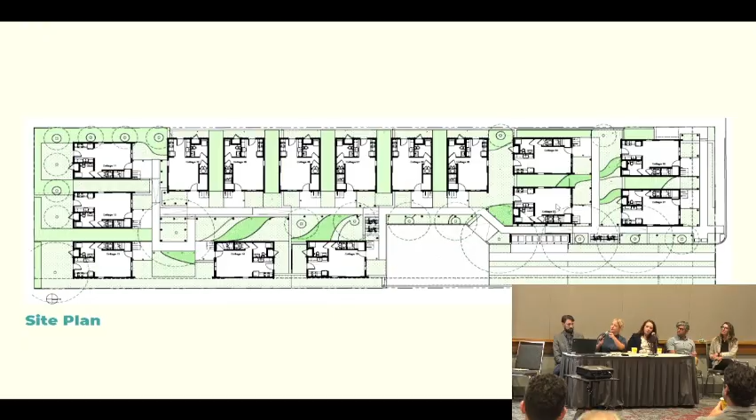It's actually 2 clusters, one larger courtyard in the middle and a smaller courtyard. And then we were able to get a drop-off zone and fire access through the fire lane on the bottom of the site.

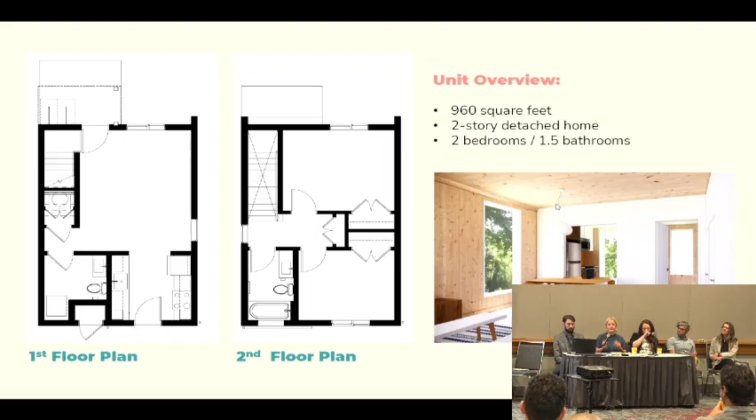Here are some of the unit plans. As I mentioned, it's just under 1,000 square feet, and we have 2-bed, 1.5-bathroom units here. You can see we're really focused on the detached model rather than attached, because we love to have extra daylight and a really livable, marketable plan that works for a variety of household types.

Critical to the Shortstack vision here is also studying how we can find design, cost, and construction efficiencies, and the use of mass timber we think is a really important tool in this research. It didn't pencil out at this scale to build all 15 homes utilizing mass timber cross-laminated timber panels, but through a grant from the U.S. Forest Service Wood Innovation Grant Program, we were able to do one home with cross-laminated timber walls, roof, and floor panels, which you can see here.

The panels flew in one day. It went up really fast, and we're excited to show some information at the end of this project as a differentiator—not just what is the cost difference or the time difference to build, but what is the marketability difference? Is this the first home to sell, or are buyers not really that interested in a wood home? So we're going to have some interesting feedback coming out of that.

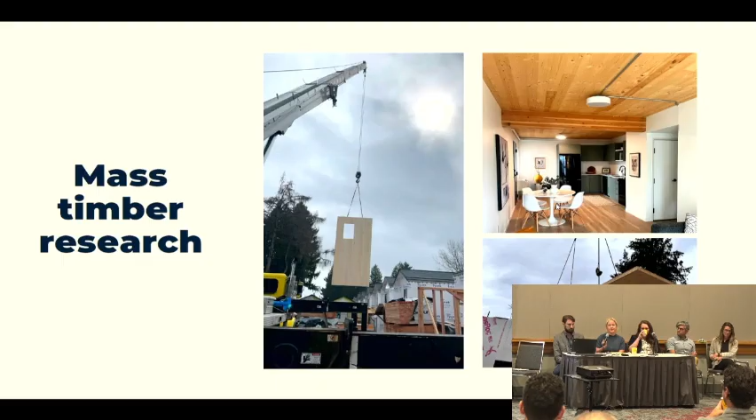Just briefly, our latest cottage cluster site is part of the Hillside Master Plan redevelopment led by Related Northwest, and part of the Housing Authority of Clackamas County repositioning that Gloria is going to be talking about. You can see here, we took what we learned from the other Milwaukie site, and we're able to fit 20 homes on this lot, and we are building some off-street parking here because the width of the site really lent itself to that.

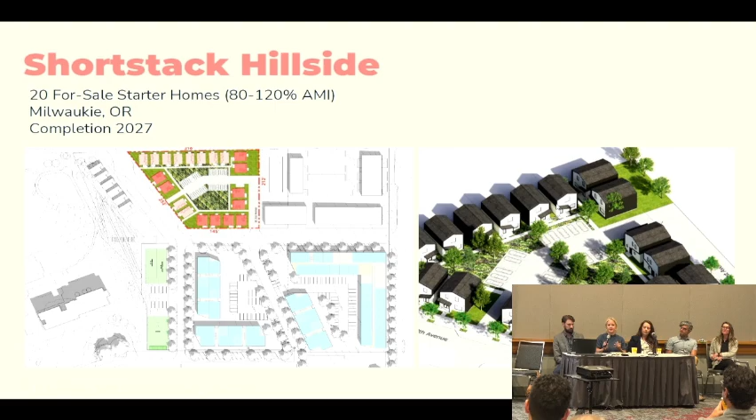In this case, we are prototyping a 3-bedroom unit in addition to the 2-bedroom unit. Again, I think it's a great example of how that medium density or neighborhood-scale density can be a really comfortable result from the cottage cluster zoning, where it just fits pretty well within a residential neighborhood and doesn't feel completely out of place.

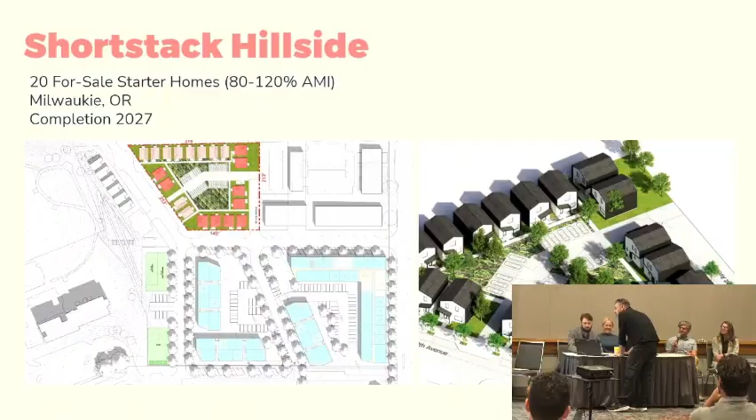Yeah, oh, we've got pictures. Guy, just real quick to your question, we had similar approaches. There's a lot of confusion about what's a front door and what's a back door as you start to take cottages and rotate them around.

And so there were a lot of different permutations that came up, especially on a bigger site that we ran into. I'm going to jump ahead a bit to one of the challenges we ran into as we've been talking to other property owners and developers about how this model might translate: the state middle housing code is being interpreted differently by most jurisdictions around the state. Some will allow attached units, some won't. Some have you pivot to a quadplex if you want to attach units, and that comes with a different set of rules.

And so the interpretation at the jurisdictional level, I should have talked to it when I had it up on the screen. There we go. The jurisdictional interpretations have been different, so there's a bit of a warning in trying to translate these models, it does take some work.

So picture what you just saw. All right, can I click through? Let's do this real fast before it glitches out again. Oh wait, except the clicker's not working. I'm really glad you're all here for this. On that, the remote is on the other laptop. Oh, okay. Oh no, okay. Which one do you need up? The first, can we go back to the cluster diagrams? Brilliant, one more, there we go. All right, take a picture on your phones, just in case, just in case.

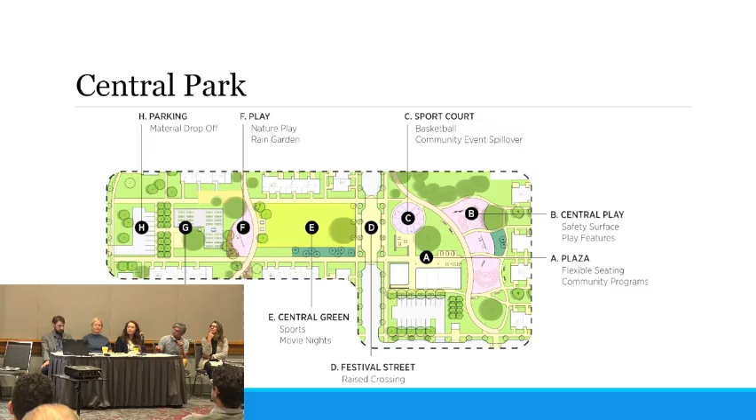One thing to note is this parking lot is one of our few off-street parking spaces. Because we were already building streets, we had the opportunity to put roughly a 1-to-1 parking ratio on street and avoid having to pave more of our beautiful site, leveraging that for more open space instead.

Our community building was a unique challenge with the cottage cluster zoning code. It has a kids' play area, small classroom, resident services and property management offices. We also have a large community room and kitchen gathering space in here.

Some of the unique math involved was that this building had to be created as an accessory to one of our cottage clusters. The way the code is written, you have a maximum footprint allowance as well as a maximum per-unit allowance. So we had to back into how big we could make this community building by creating one of our clusters with the smallest possible footprint so we could borrow footprint for this.

So we created a cluster of all one-bedroom units so that we could have this space. We were hopeful we'd be able to borrow from multiple clusters, but because of the interpretation of the code, that just wasn't the case. So again, there's some nuance to the interpretations as you're stepping into similar parallel projects.

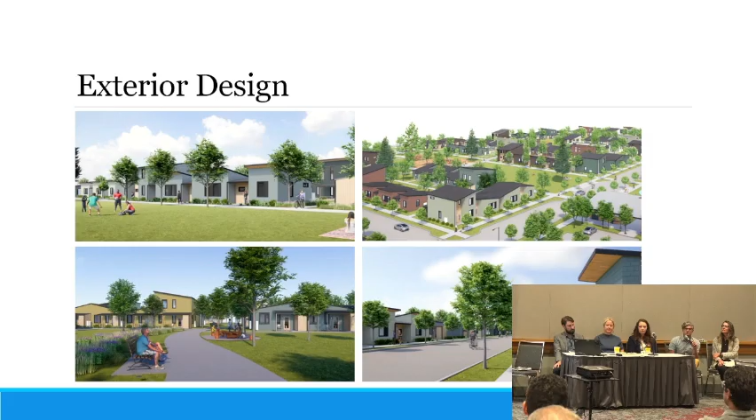Beyond that, we leaned into color. We've got a palette of 5 different colors, and we tested whether 3 colors were enough, or 4, or 5. We wanted to use a monochromatic palette across each of the quadplexes, but then mix those in so you still felt like you had variety between the roof pitches and the color palette we were using.

And then our 3 and our 4 bedroom units, other than the accessible ones, are all townhouse units. Those are 2-story units. We had pretty extensive conversations with our residents about which side of this building is the active side, which side is the quiet side, what does front door even mean in this context? From a resident dignity standpoint, all of these residents have their own front door and back door, right? So the differentiation to a lot of other product types we're seeing in affordable housing, even in market rate housing, is pretty significant in what this offers the residents.

I think we heard a lot of support for it day one in those community meetings because of it. Where we landed was that residents really wanted their more active spaces, their living room, dining room, kitchen, to be off of the courtyard, where we have a covered porch and some outdoor storage for each unit. And then we have a smaller, more formal entry alcove front door off of what is typically the street-facing side. Sometimes that rotates to be between courtyards as well. But that quieter side has the bedrooms off of it. That's kind of the direction we heard.

So all of these units, from an efficiency standpoint, we took our 1 bedroom, we added a bedroom next to it, and scaled it to get our 2. Our 3s and our 4s are very similar. Our accessible units are also very similar, they just scale by a couple of feet to get the turning clearances and things that we need in there. One other unique challenge of the cottage cluster model was our 3 and 4 bedroom accessible units.

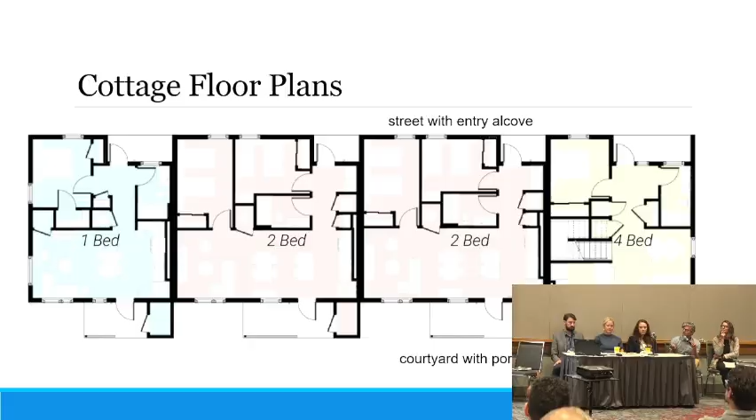One other study that we looked deeply into at the beginning of this project, on the Housing Authority's queue, and I think both our interest and Trubec's together, was whether it would be more cost effective to build this as a modular build, so full volumetric modular, or to stick build on site. So we started the design process laying out the units for modular efficiency. We coordinated with a couple of different modular providers, learned about their systems, and toured a couple of their factories as well.

Knowing that it would be easier to go back to stick frame later than the inverse, by the time we hit about 50% schematic design, Trubeck took those initial drawings, vetted them, and got pricing from a couple of different modular fabricators. They brought them back, and after some fine tuning around 25% design development, we made the call. We ended up going stick frame in the end.

It was close. The big challenge and delta we ran into was that we have visitability requirements, basically accessible path requirements to every unit entry, as we would want anyway. That was because of the OHCS funding we were taking. That meant the modular units, which usually want to sit up on a concrete stem wall because they have a framed floor on them, would have to somehow be dropped down so they had a zero threshold entry off of the sidewalks, which led to some very expensive waterproofing detail, because we all know we don't want to put wood below the ground.

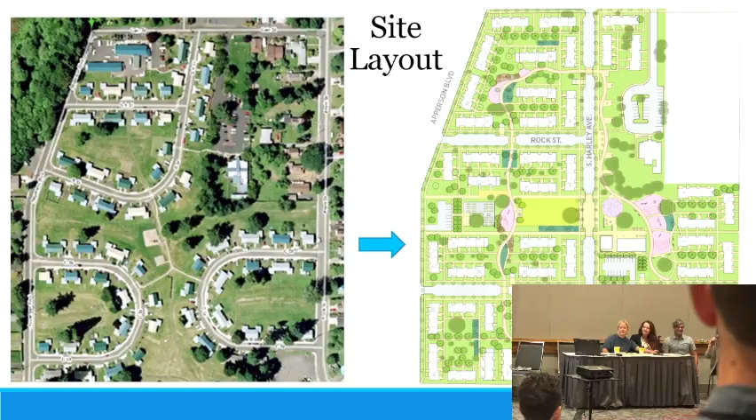That's a great question. We ultimately landed on private streets so we could provide the street parking we wanted and be able to assign parking spaces to units. Being able to park right outside their units, in the previous iteration, was something really important that we heard from the resident advisory group. But we went back and forth on it for a while—were there other reasons I'm not thinking of? Was there a cost differential on the infrastructure between public and private? No, we were still held to the same city standards, even as private streets.

Just a question about the tenants—the former tenants that were moved, they were all renting, right? You redeveloped it, are you planning on selling each unit? No, they'll be rentals still. They will maintain rental status, all of them? Ah, okay, sorry, my bad, misunderstood.

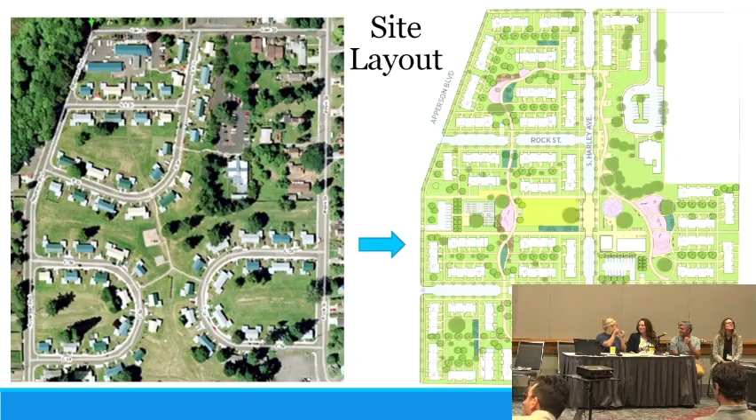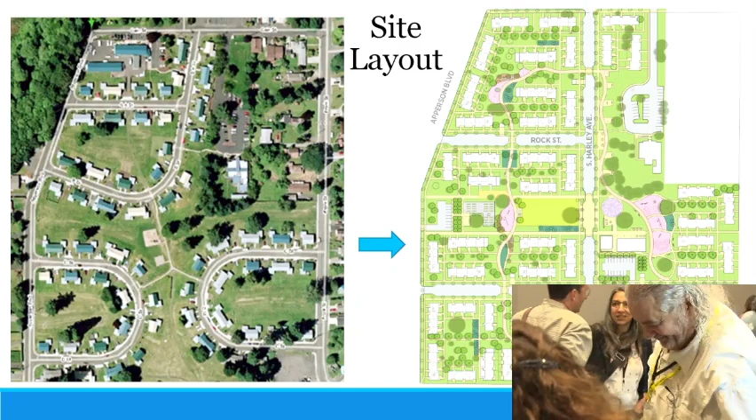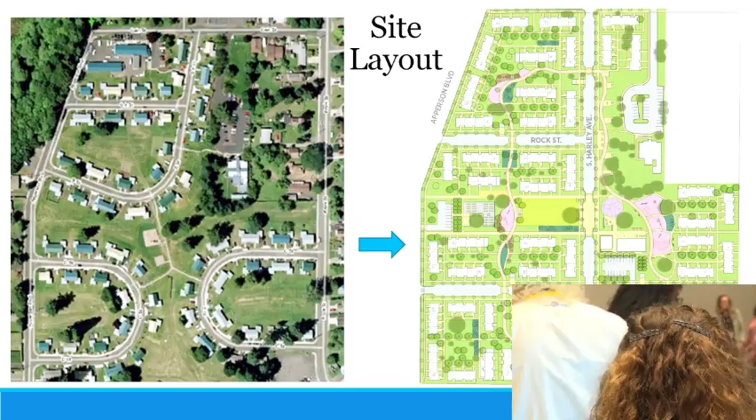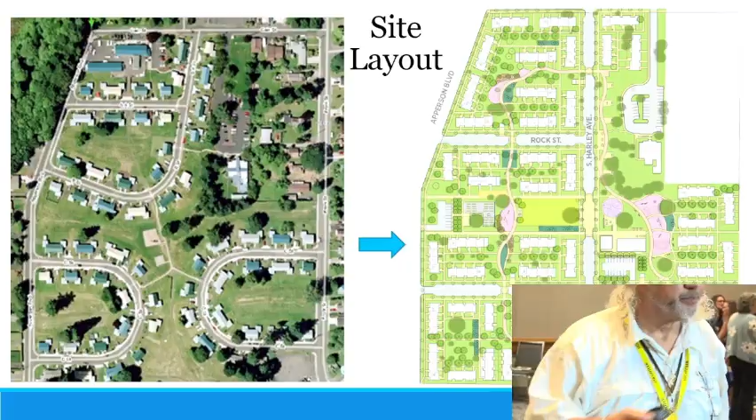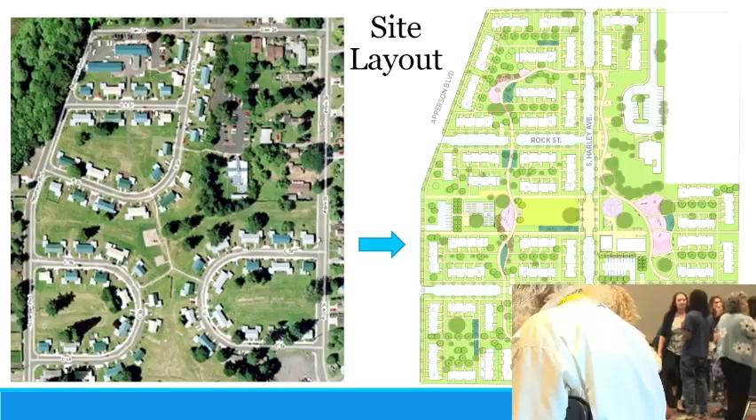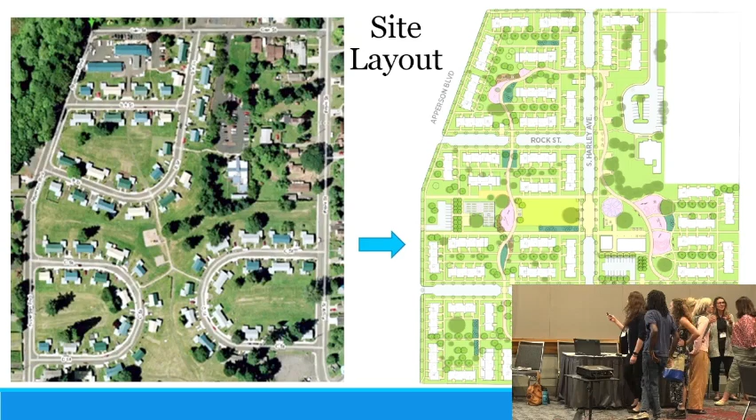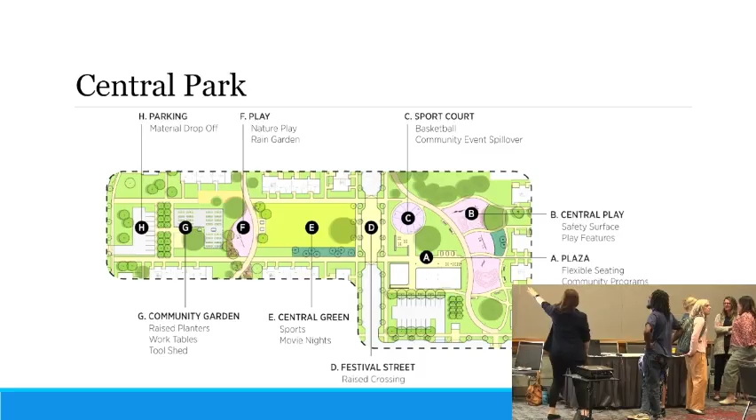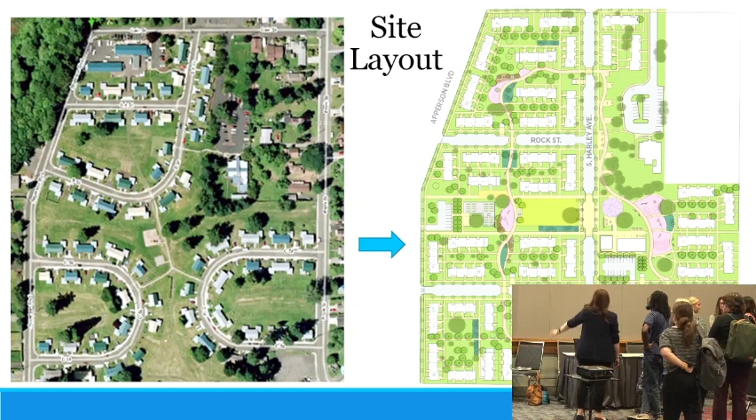This is all meant to be like a waterfall down of different things for kids to play on. Throughout the site there are different play areas—one's for jumping, one's for sliding—I think it'll be really cool. It'll be a really cool walking community, not having to do any maintenance but still being part of the community, giving up those big old houses you can't maintain anyway, for people at the Shortstack.

We didn't clarify... okay, yeah, there was some clarification. I know, yeah, it would have been.

They're separate, we're partnering. So the Shortstack project, the Milwaukie one, we gave them a grant of $750,000 for Metro. And their Hillside project is on our Hillside Park place, so it's integrated in there. That was another tricky thing we weren't sure how to talk about.

Yeah, oh, okay, yes. Thank you. Can you remind me of your name? I know, yes, you're in the mentorship thing. Is your hair different? Oh, no, oh okay, okay. Yeah, I like it. Anyway, thanks for introducing yourself, sorry I didn't recognize you.

Yeah, glad you're a part of the mentorship, or well, one in general. Hopefully we'll start doing more. Yeah, thank you, have fun. Conference essential, yeah, I love it.

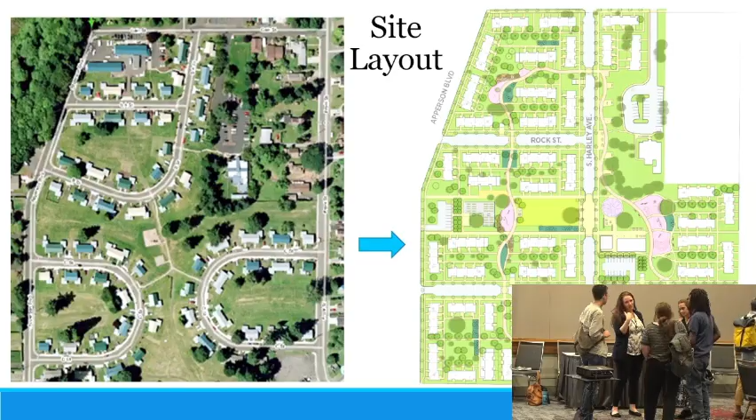I love that you guys have like - and she was telling us, it was like, can we continue to do this?

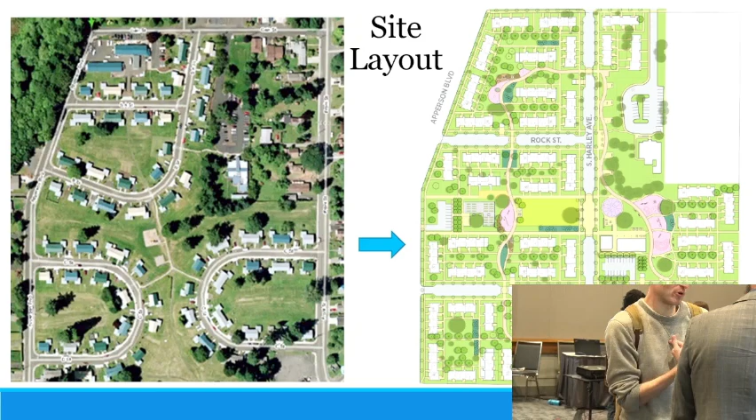I can see you too. Did you used to be livability? Yeah, okay, your cultural events, okay, I got another role title to remember for you. Your ground source, the geothermal, yeah.

Okay, and how awesome, it's attached. Yeah, there's a bunch of holes with pipes in there that collect the heat. I have very bad knowledge of how all this works. I would like to see his drawing - oh, it's your drawing, okay, I'll show it to you if you want to see it. I'd love to see that, actually. But you guys should be very proud of what you committed to.

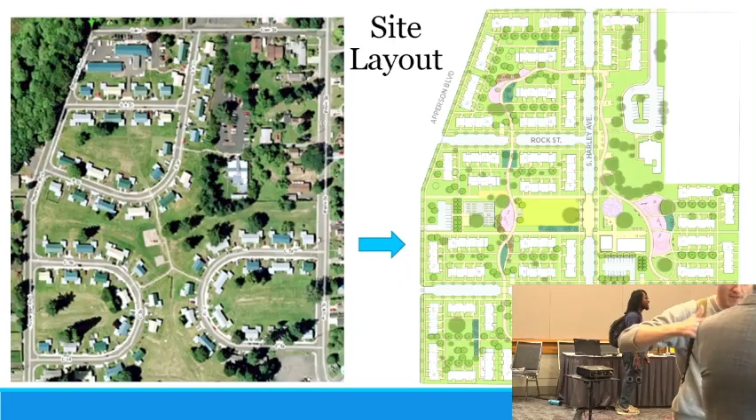Yeah, okay, bye, good job. Oh really, too, by the way, just like the flowing slide deck. She's getting the word out? Yeah, I thought it was good. No, it wasn't even there. Really? Yeah, yeah, oh, and now it's - we're being... okay, see you tomorrow, okay.

Can I stay by you, Brian? I'm sorry, yes.